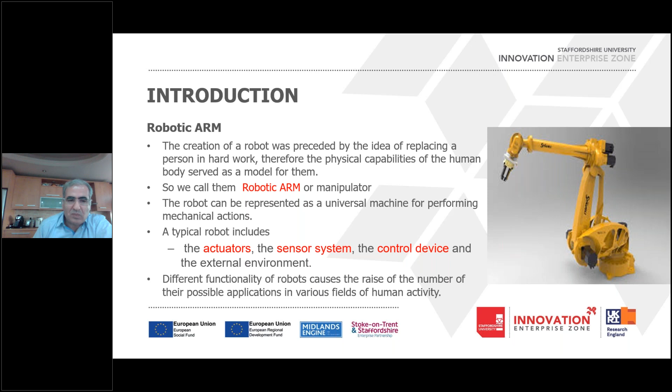But the interesting thing is that this industrial robotics era is a little bit going to finish. It means that the application of industrial robots is limited. They can be used in environments that are fully engineered. You know that the environment in companies or factories is fully engineered, every piece well thought out and well designed for safe operation of the robots.

The robots in factories usually do repetitive work, and they work in a controlled environment, and they are usually used in a production line for producing materials that last for a long period of time. Typical applications include welding, painting, assembly, pick and place, packaging, labeling, and palletizing. The robots can do such applications with high endurance, speed, and precision.

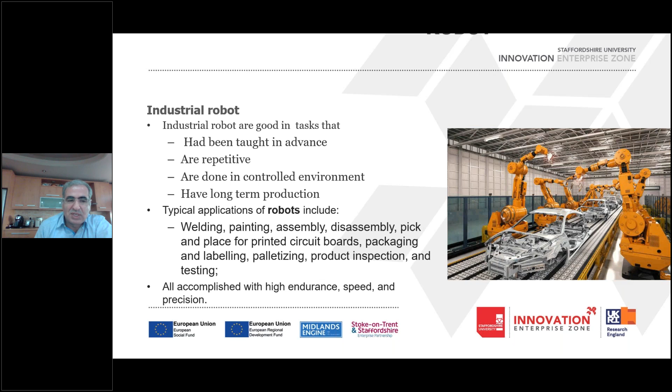But now we are facing a really interesting paradigm shift from industrial robot to intelligent robot. This paradigm shift has become available due to the advancement in robotic and AI research. In fact, we have seen many important advances in AI technologies and algorithms, especially in computer vision.

Computer vision has the same functionality for the robot as for a human being. For human beings, more than 90% of our information and perception of the environment depends on our vision. So due to the advancement in computer vision and AI algorithms, now we can bring the same level of perception, understanding, and knowledge about the environment for robots.

This means we can expect robots to do almost everything that a human being can do, because they are going to have vision, something that was not possible, for example, 10 to 15 years ago.

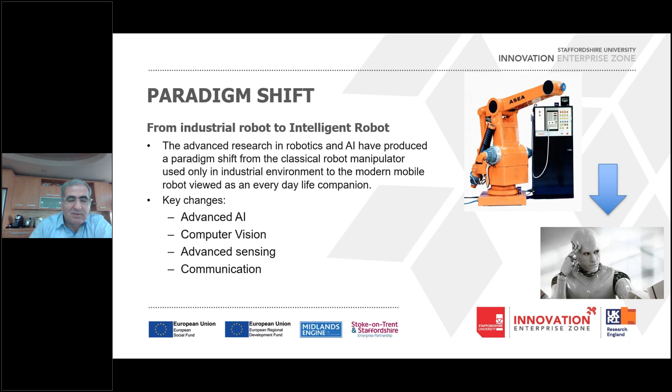Also, there has been good advancement in communication. Now we can hope that we can communicate with robots using natural language. If this barrier is solved, then we can see that robots will work not only in factories, but almost in every place you can imagine. The limit of the new intelligent robots' application is, in fact, human imagination—whatever kind of imagination can end up making an innovative and new robot.

In fact, in the beginning of the 21st century, the industrial robot was born again as an industrial intelligent robot. As I said in the previous slide, industrial intelligent robots use a combination of ordinary robots plus AI, and from AI, usually we mean that they have vision and intelligent force sensors.

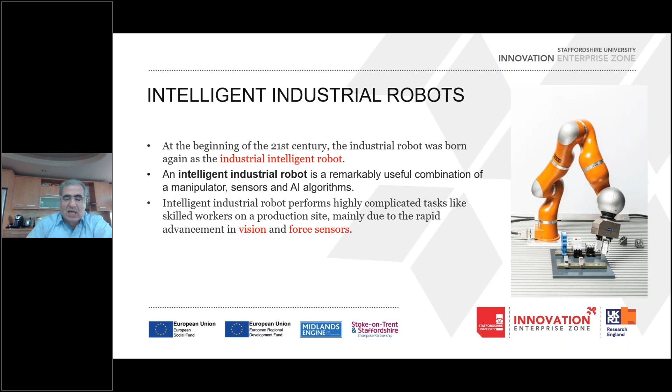And I can talk for months about intelligent robots, but as I told, I would like to limit my presentation to only the projects that we have done to realize intelligent robots for industry and also for other applications.

I start my first case study with a very important and essential ability of an industrial robot. In factories, ordinary industrial robots can pick up only the objects they have been programmed and taught by the operator in advance. But if you are going to bring an industrial robot to everyday life and ask it to grasp any arbitrary object, then the robot should have the ability of selecting the proper position and location for grasping any arbitrary object, one previously unknown to the robot.

We have done several interesting projects, mostly master's degree projects, that teach industrial robots the best place for grasping an object. In the picture, you see different objects and the offering of the algorithm for grasping. For sure, it is only one part of the grasping, because after the perception of where to grasp, the robot needs to plan to reach that position and also use control algorithms to apply enough force to locate that object.

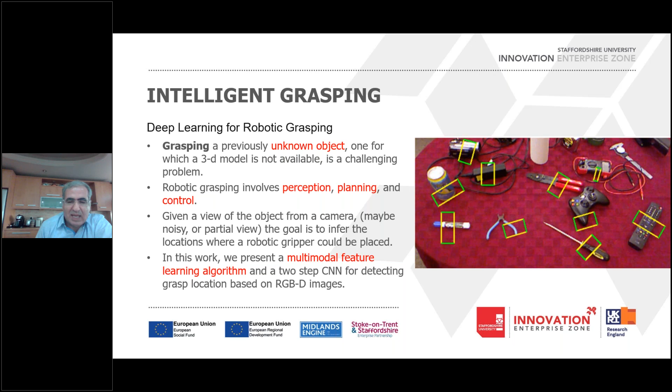We also had another interesting project. We did it for a car assembly plant. In a car assembly plant, they use a robotic arm for glazing glasses on the car window. For an industrial robot to be able to do this glazing job, the robot needs to detect the precise location of the window, and it has to be done with sub-millimeter precision, because even a few millimeters of misplacement of the window will make the window pins break and cause damage.

To the company, we used almost 8 different cameras and a sophisticated computer vision algorithm to detect the precise location of the window, and we could correctly locate it and guide the robot to install the glass on the window. It was a very successful project, and the assembly line is still using that device.

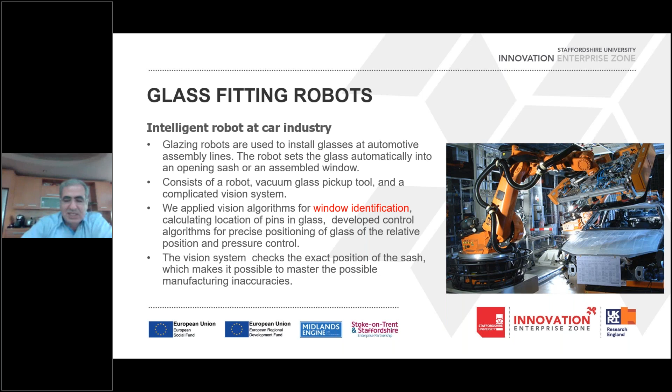Another industrial project for bringing intelligence to robots is related to warehouse robotics. In fact, warehouse robotics is a very, very hot topic today, because with COVID-19, people went for online shopping. Online shopping websites have to be very fast to be able to deliver on any orders and inquiries they receive. So without proper robotic and automation facilities, they won't be able to reply to all the inquiries they get from customers.

There are many commercially available warehouse robotics. What we did as a project for one food factory was that we made an autonomous robot teachable, in fact, by the operator.

In this project, the operator uses hand gestures to give commands to the robot, such as follow me, stop, turn, or other simple commands. This robot helps the operator do his functions with more speed. The operator moves in the corridors of the warehouse, and the robot follows the human. When the human stops, the robot stops too, and the human loads the robot and gives a hand gesture or voice command, and the robot takes the goods back to the predefined station or a station commanded by voice. This project is also being used in that warehouse.

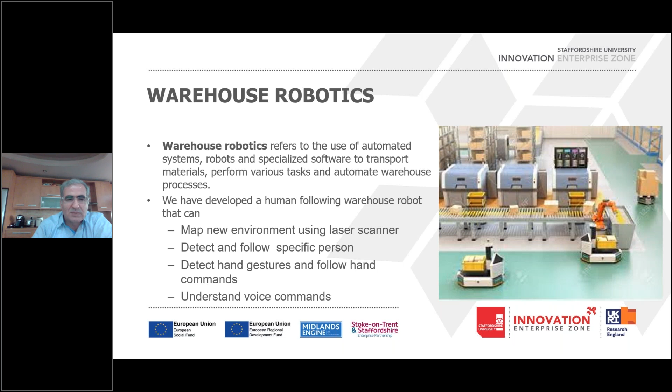Another industrial application of intelligent robots is poultry robotics, which is going to change the face of this sector. What we are going to do for this sector is introduce a very, very low-cost intelligent robotic system, because this product is not an expensive one, and farmers cannot afford high-cost intelligent robots.

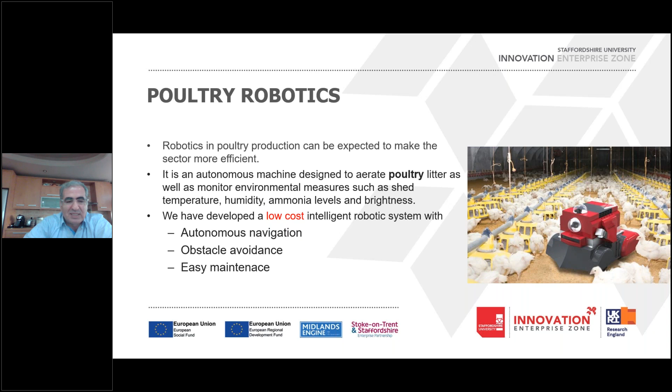It's some kind of contradictory request. On one side, we want to have intelligent robots, meaning the robot needs a camera or localization system and a computer to analyze the pictures captured from the camera. On the other side, you need these systems to be inexpensive and low cost. So we are going to use some kind of embedded vision system to make these robots cheap, affordable, and easy to maintain for this industry.

Another project ongoing in our university related to intelligent robots is telepresence. A telepresence robot is a remote controlled robot with wheels and communication means, usually a camera and microphone, so the operator can see the environment and interact with people using microphone and speaker. But there are many limitations in teleoperating the robot over distance by untrained people, and it's really uncomfortable for them. So we are going to introduce some intelligence to the telepresence robot.

We want to lower the level of human operator functionality, limiting the functions the operator needs to do to very high level ones, and let the robot do the rest autonomously. For instance, if a doctor wants the telepresence robot to go to the patient, they simply ask this request verbally, by text, or any other means, and the robot itself finds the patient and goes to the proper distance. This is our ultimate goal for this project.

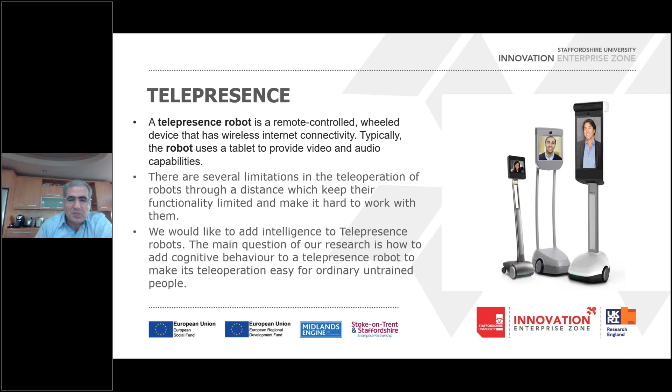Another very interesting project we have done with intelligent robots is teleoperation using piezo actuators for cell manipulation. This is a telerobotic operation, but with the difference that you have a micro-macro teleoperation system. It means the operator wants to do a very tiny movement, for example a sperm injection, which in traditional application is done with lots of error and cost for the patients.

Usually they do it using a microscope, seeing the sperm and manipulating it by hand, which is very difficult and needs a lot of training. What we did was use piezoelectric actuators to do this movement and operation, while the operator uses an ordinary joystick to move the sperm. With this kind of micro-macro operation, we could reach a high level of success. We needed precise modeling of the movement of both parts, and also an accurate control model to be able to do it without damaging the sperm.

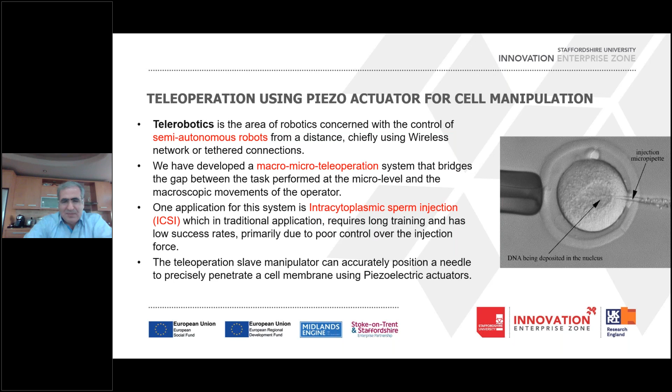As another kind of intelligent robot, I can name humanoids. We have quite extensive experience in making and programming humanoids. With a humanoid, any action it wants to do needs lots of AI and machine learning algorithms. Even a simple walking or climbing stairs or any other action needs AI techniques to be involved.

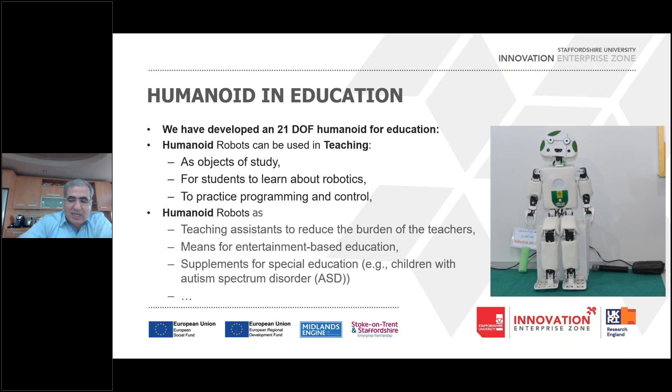We also have experience using the Pepper robot, a commercially available humanoid robot. The first humanoid robot I showed you was made in our department, but this one is commercially available, and there was a lot of advertisement and propaganda for using it. Unfortunately, this robot was a complete failure due to the simple fact that people expected it to have a high level of communication ability, which is not available these days.

For robots such as Pepper to work successfully in society, they need to be able to communicate verbally with human beings. These dialogue generation systems have not been developed yet to a level sufficient for robotic applications, so we had the same problem with the Pepper robot. We developed a semi-intelligent user interface that helped our robot be better acceptable in different situations, and it helped our robot get out of a difficult situation when it couldn't understand the conversation with people.

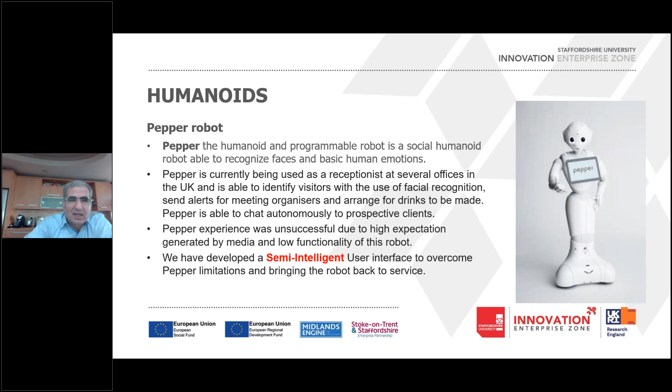We also developed different kinds of chatbots. Chatbots are used in many industries, and they can be used for intelligent robots as well. Any development in chatbots and dialogue generation systems can help us develop intelligent robots more quickly. The day we solve this communication problem with robots, we will see many amazing applications of robots in the market.

In our research, we have developed a deep reinforcement learning dialogue generation system for domain-specific conversation. Domain-specific means our system can be used only for limited conversation with the robot, with scenarios for special places such as shopping malls, banks, hospitals, and so on. We have developed many different sections of this dialogue generation system, and it is a kind of still ongoing research that we are doing with a few PhD and master's students involved.

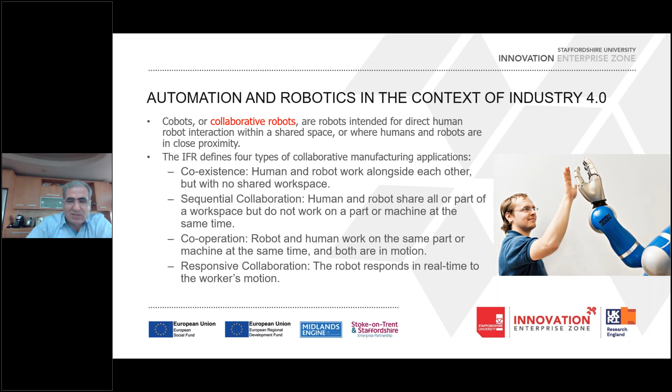Another aspect of robotic intelligent robots is inclusion of robotic automation as part of Industry 4 revolution. It is for the first time that robotics are being considered as a pillar of industrial revolution, and it means that robots need to coexist with humans in many different aspects, shapes, and kinds of coexistence or cooperation. One important factor for such robots is safety.

Consider that people are going to work with a metal-made robot in a home environment, and a heavy 90-kilogram robot hits a 10-kilogram kid — that's not a fortunate moment for the parents.

So what we have thought of as a solution for coexisting of robots and humans in the same environment is called soft humanoid. We have not been able to develop a soft one yet, because it's really difficult to make a robot from soft material that is able to walk and cope with or coexist with humans in the same place. But we are working on it.

We have developed several actuators and even a moving arm for it. We are working on the modeling, control, and also fabrication side of this soft humanoid.

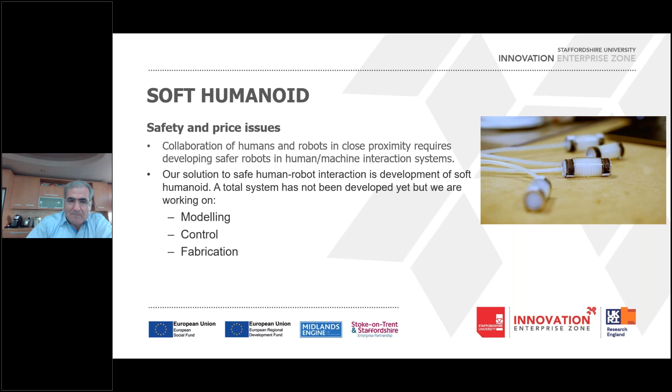One other aspect of intelligent robots is their use in smart cities. For sure, if you want cities to be much smarter than they are now, you have to see much more robots working and giving service to different sectors in the city.

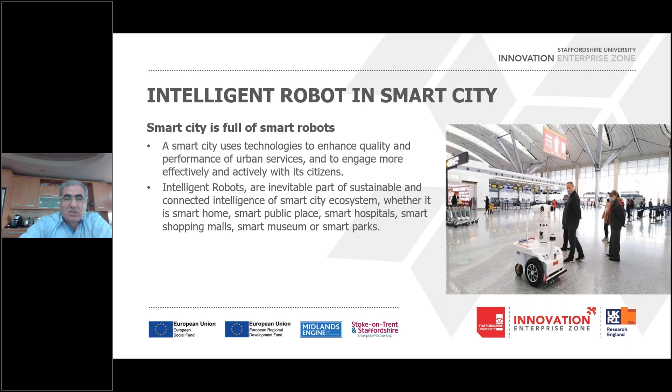We have done some robotics research to provide robotic solutions for smart cities. For instance, we have developed different kinds of omnidirectional robots — robots that have 3 or 4 wheels and can move in omnidirection in different spaces.

We also have developed rescue robots, part of the workers of the next generation cities. We have developed flying robots for parcel delivery in the cities. We also have developed a sewer inspection robot, and home robots that we believe are part of our future cities.

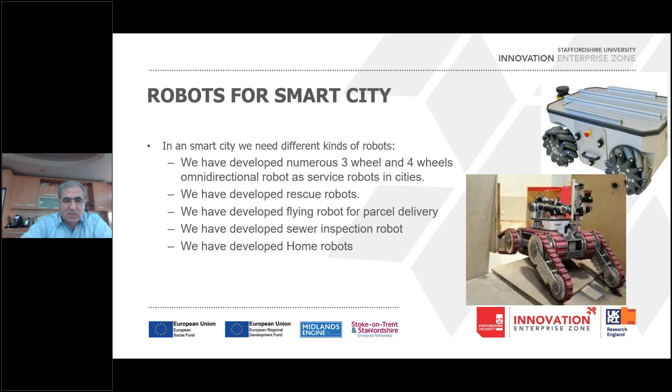In our research for developing home robots, we have developed a system that we call HRPS. It's a kind of GPS for indoor localization. Unfortunately, current GPS systems are not suitable for indoor environments, so we had to develop our own innovative method for, in fact, imitating GPS functionality in indoor environments for robot localization.

Our home robot, in fact, has human tracking ability, human detection, action detection, recognition, and so on. We also have done several projects on cognitive map generation for mutual understanding of the environment.

Usually robots use different kinds of sensors for mapping an environment, but the map that a robot generates is useful for robotic applications, not for communication with humans. So we have developed a kind of cognitive map that robots can use both for their localization and also for communication with human beings.

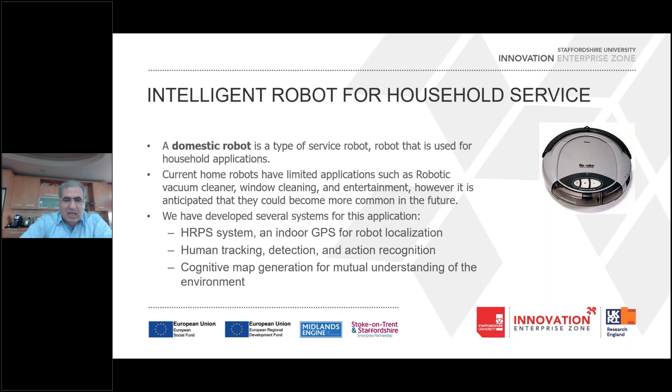As I mentioned, we also have made an intelligent inspection system. The robot is named KANTARO. It can inspect pipes with almost 200-millimeter diameter, mostly used for sewer pipe inspection. It has both intelligent software for detecting anomalies inside the pipe and also an intelligent mechanical system to move through bends or junctions of a pipe without external interaction or the need for any sensing ability.

We also have done several research projects addressing problems that intelligent robots face inside cities, such as large-scale SLAM. SLAM is a famous problem for intelligent robots — it means that robots make a map of an unknown environment and then localize themselves in the same map.

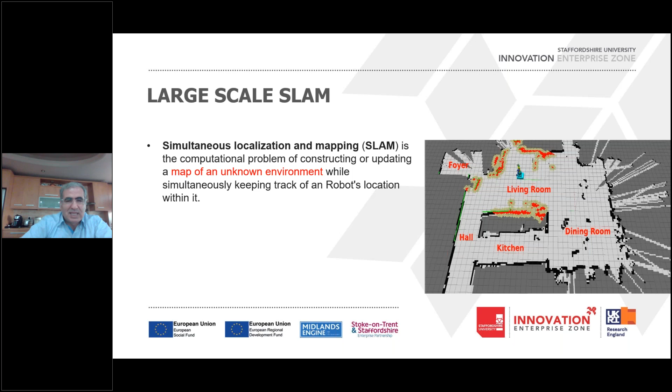There are many different algorithms for making SLAM, but making SLAM for cities, especially using a visual camera — which is called visual SLAM — is challenging because the images we receive from the camera are very high dimensional data. To use them properly, we have adapted different kinds of dimensionality reduction techniques, mostly based on manifold learning, which help minimize the size of the image and change one picture to very limited dimensions, then use advanced graphical methods to infer the position the robot is in the environment.

There are also several students working on the visual SLAM project too. So I guess my time is over now. Thank you again for joining this conversation. I hope it was useful for you. If you have any questions, please send them through the chat facility — I'm here to reply. Any other questions can be sent to my email. Thank you so much.